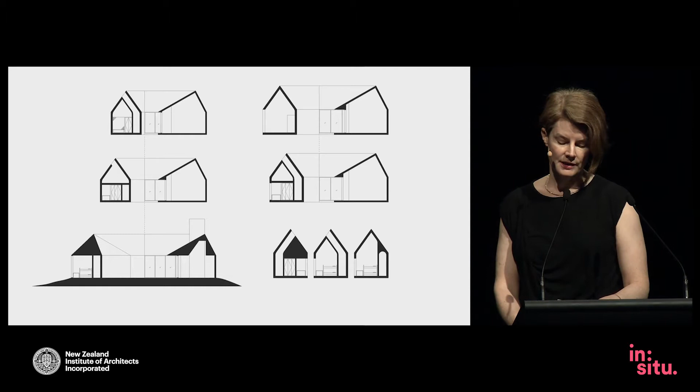At the beginning of each project, we establish a methodology of working by defining the rules that we are going to challenge as we work through the development of spaces and how they relate to their context and materiality. By establishing these methodologies, we're declaring that the critical aspect of architecture and discourse is significant, and the client understands that we will be bringing this criticality to the project.

Often in our practice, it is a set of limits that starts to define the establishing methodology of the work. So it's not about what you can do, but what you can't do.

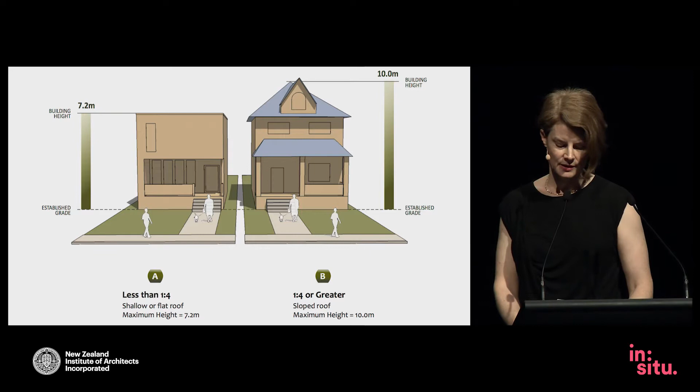A number of years back, the City of Toronto limited the heights of flat-roofed buildings, so we developed a project with a pitch that had these carved light wells subtracted from it. We parametrically associated the geometry of the cone with the various construction systems that we figured would be most buildable, looking at dimensional lumber in particular, and using the digital model to ensure that we had control over the lengths of the members, structural capacity, and things like that.

Limits can range in scale from broad regulations like zoning and building codes to the minutiae of the size of dimensional building products. For example, the number and thickness of laminations in a piece of airplane plywood.

Sometimes the limits are more esoteric, like the learning curve involved in folding new technologies into your practice, either on the design or the fabrication side of the equation.

I bridged the digital gap while in school, so I was trained by hand, but have developed strong digital skills so that I'm never far from the means of production. Everyone in our office kind of shares this bridge between hand and digital programming and things like that.

So this is where I'm from. I was raised in Chicago, and 20 years ago moved to Toronto when Shane got his teaching position at the University of Toronto. The city of Toronto is the fourth most populous city in North America and the largest in the Great Lakes region.

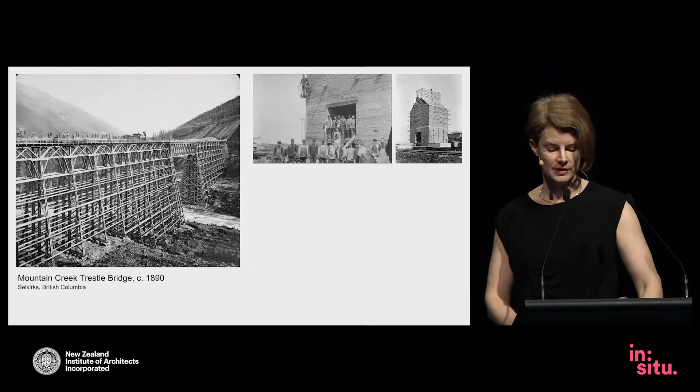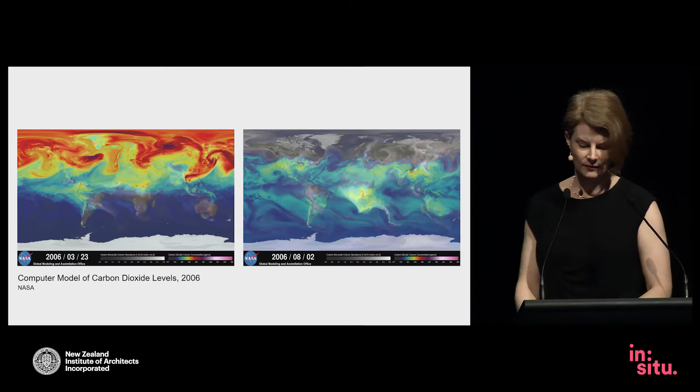In contemporary building, new growth timber is the only major building material that grows naturally and is renewable. It is sustainable, acts as a carbon sink, and has a low energy of production. Where steel and concrete were the focus of 20th century development in the building industry, we believe that technologically advanced wood products will drive the next wave of innovation. Canadian architecture should be at the forefront of this work.

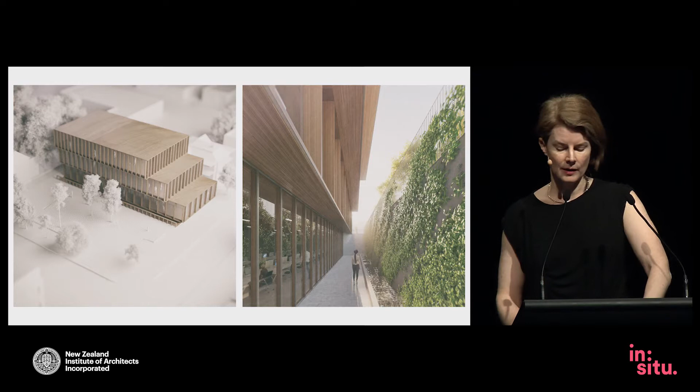This is a 3-story spec office building of mass timber construction that's currently working its way through the site plan approval process in Toronto, and we're really hoping that it comes out the other end intact and that we can actually achieve the building in timber as it's been designed.

Our proposal for the Canadian Prix de Rome, a traveling fellowship we won a few years back, was to research emerging wood technologies and to study the use of digitally fabricated construction, which we had been looking at on the scale of furniture and millwork for years.

After we finished our research trip, we mounted an exhibition called Living Wood. The work in the exhibition explores wood's material history with a digital exploration of the effect of mass movement in the landscape on the growth and form of trees.

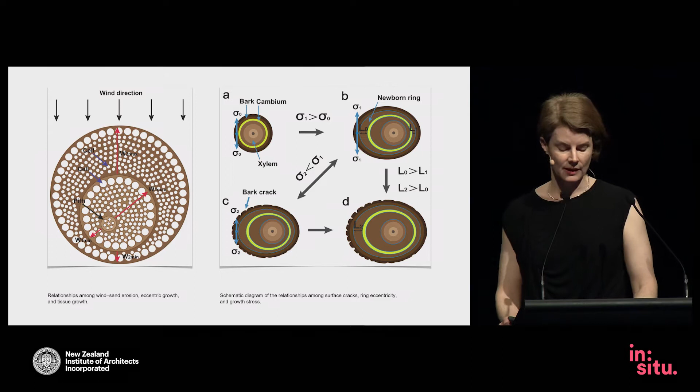Mass movements can also be caused by other forces like wind or a particularly heavy snow, which is the current hypothesis behind the crooked forest in Poland.

Tracings is a 200 square foot grid made up of 288 individual squares of Ontario white maple. Each piece was CNC milled to a depth that registers the angle of a curved surface projected onto its face and the depth. From a distance, one reads the undulating plane registered on the wood surface, and up close, the subtle differences between the pieces become apparent.

This urban forest is primarily designated as parkland, largely undeveloped and fiercely protected by local conservation authorities. Buildable lots that back up onto the ravines are prized, and the most valuable land in the city, in a city already known for really high land values and real estate prices.

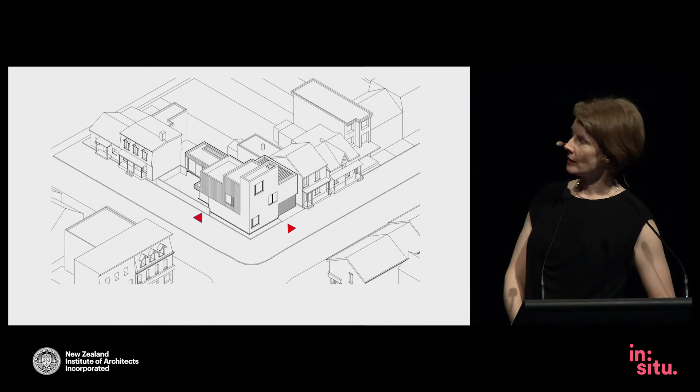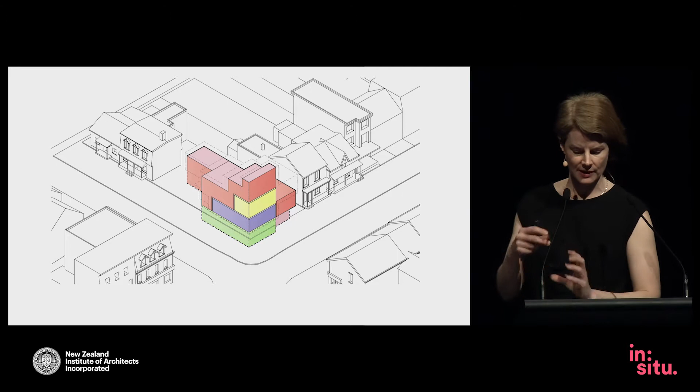There are 2 entrances, one on each side: on the left for the family and the right for the rental units. The entrance on the right corresponds with the green and blue massing shown here, which is a 2-story, 3-bedroom apartment that can be split by floor to allow for 2 separate rental units. Or for aging parents, the ground floor unit in blue can be combined with the single-family home shown in red—like a little puzzle of units stacked together. The yellow unit is the bed sitting room, originally developed for the grandparents and the family.

Each unit has a private green space associated with it. Increasing density on the site while at the same time increasing the amount of occupiable green space was a critical development in the project. The extended family shares the courtyard in the back, where the cooking and living spaces are, and each family member has their own private and protected terrace. The massing on the right, with the green space behind it, is over the garage, and there's a wall in front of it, but it's open to the sky.

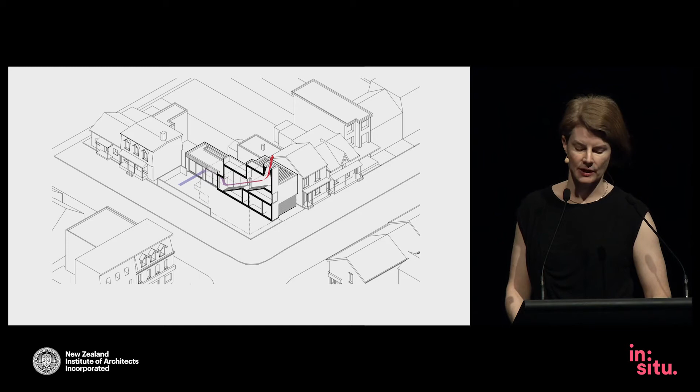We say the house acts as a blowfish—it's bigger than it seems because we captured exterior space with the front facade to increase the presence on the street. That green space was designated for the grandparents because they had really specific ideas about exposure and did not want their open space on the ground floor. The single-family home that climbs over the stacked units is connected by a straight-run stair with a skylight at the top, allowing for ventilation through the house.

While not explicitly a performative house from a measured sustainability point of view, there were a number of strategies we employed to tread lightly relative to resource and energy. The brick facade was made up of leftover bricks—we called all the brickyards in the city and asked for the remainders, the piles left over from bigger jobs that don't get used and would have otherwise gone to landfill sites. That's where we got all the brick for the project, and to unify them afterwards, we painted them white.

You'll also notice we have really small glazing units. In this project we have an 18% open envelope, meaning there's more wall available for increased insulation. There's a massive ice storm problem in Toronto, so we really need to keep all the heat into the houses—sometimes small windows is a good thing. The high-efficiency heating and air conditioning systems were broken down by unit, so you could turn them up and down depending on who is there and using them.

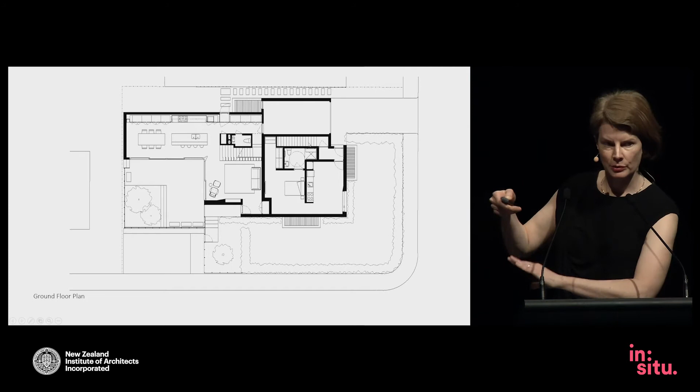I'll quickly just show the plan, this one critical piece. The family area is on the left here. This is the handicapped accessible rental unit with the door here, and a second door to the basement there, so you can split those 2 units. But the critical piece is actually this closet right there.

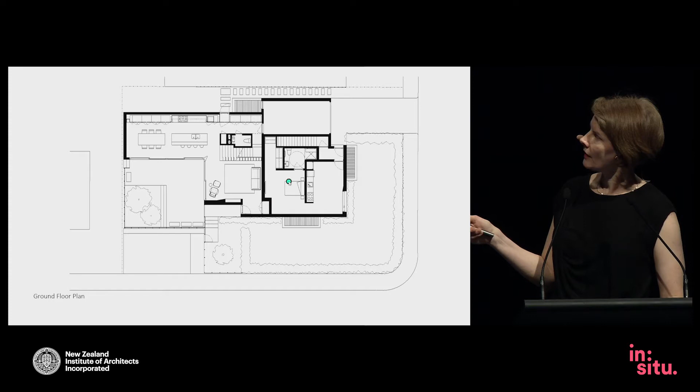Until the parents need the unit, that's a closet. As soon as mom and dad can't walk up and down stairs anymore and need to move here, which is fully accessible, this wall goes away, the closet goes away, and the accessible unit is connected to the main living, dining, kitchen, family spaces of the house. That was really the critical piece that made the family comfortable with the flexibility.

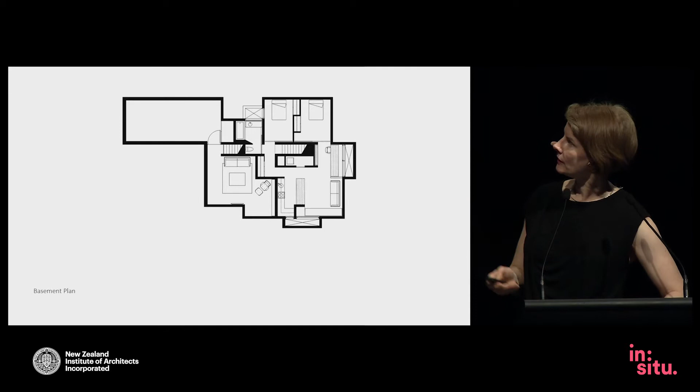Basement plan, just showing the rental unit on the right. And the family spaces on the ground floor are centered around this little courtyard where the house can open onto this private and protected terrace. We positioned sliding doors so that we could open up that corner to blend the spaces through the outside space.

Then this bookshelf stairs, the one custom piece we had, it was a relatively low budget project. Otherwise, we used all out-of-the-box systems like IKEA systems for kitchen and cabinetry. So it was actually a very economical project for the family.

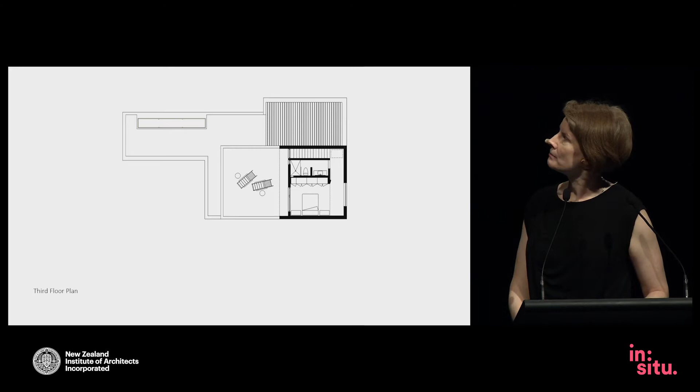When we started working with the family, there was an imperative to create ways that the family could move around the house privately. So there were these little secret stairs and passages that would cut between spaces so that everyone could come and go discreetly.

I think this really came from Shazan and Ryan feeling like they had to protect their privacy and maintain a life that was separate from their parents' life, because they didn't want to feel like they were back in high school living with mom and dad. As we worked through the design process, all of this really fell away, and instead we created spaces that were all shared.

This is also when Mr. Chu claimed the best room in the house for himself. As we were framing, he saw that the master suite on the third floor had this really big, high, north-facing window, so it was quite private, with tons of light. The south had a huge deck with southern light coming in, nice and warm. He thought this was just the space for him.

So he and his wife actually moved into the master bedroom, and Shazan and Ryan are kind of down below a little bit. But everyone's happy, which is important.

As part of the exercise of this project, we developed what we call a visual pro forma, explaining and showing how the total project cost could be amortized over multiple generations. To live multi-generationally strongly suggests a buy-in to forecast the cost and commensurate usage of the home intergenerationally.

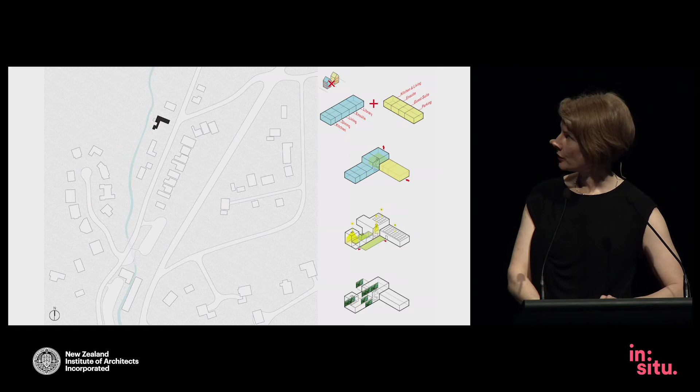The house was conceived as 2 distinct residences. On the left in the diagram there's library, kitchen, living, dining, and ensuite, and on the right, kitchen, living, dining, ensuite, extra rooms, and the garage. They sit perpendicular to each other, creating a little landscape forecourt in the front, and they stack in the corner. The parent suite occupies the ground floor, and you can see that the ground floor is on the left and the second floor is on the right.

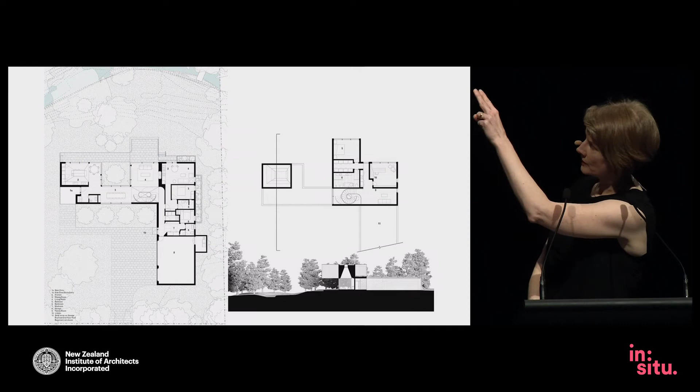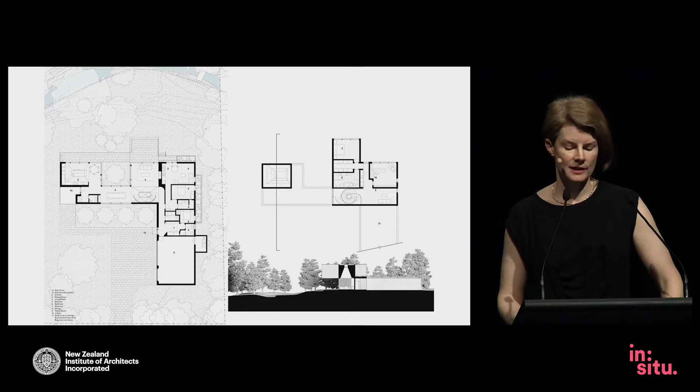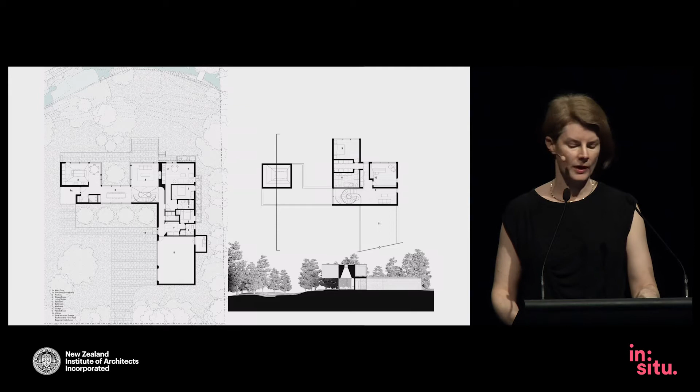In the parent suite's there's a big bar that starts at the view and works back to the garage. The suite is laid out as a single floor accessible apartment with added features to accommodate the specific challenges facing the aging parents. Among them, well-located drains and a master power switch to help mitigate issues that have come with memory loss - sinks left running, ovens left on, and things like that. A second bedroom is adjacent to that suite, but separate, for a live-in relative or a nurse.

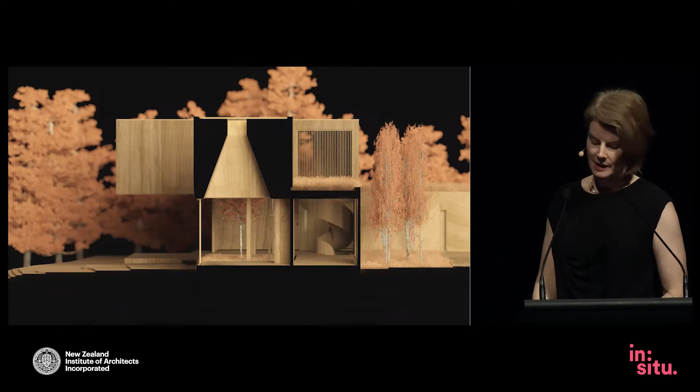Running parallel to the creek is the main residence. The kitchen on the right anchors the south end of the house. Set in a double height volume, the 20-foot tall pyramidal ceiling creates an expansive space that opens up onto the creek, the courtyard, and above to the sky.

The dining room occupies a glazed link, as shown here in the model, between the landscape that flows up from the creek through the courtyard and to the front of the house. Early in the design process, the clients told us that they never used their current dining room except on holidays, and the space was essentially wasted.

So we developed this idea of making the dining room more like a passageway, so they would always pass through it - it wouldn't go unused - and they would move between the kitchen and the living room through the space. Now, given the light and the views, they actually use the space every day, which is something they never expected and really enjoy, which is a really nice outcome for us that we're pretty pleased with.

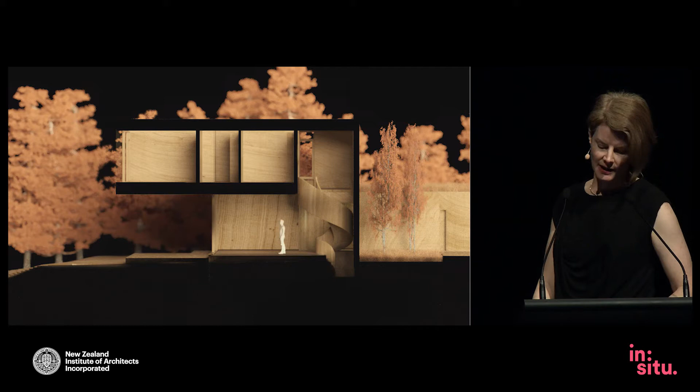The grand gesture of a wood-clad spiral staircase connects the living room to the second floor master suite, creating a unique moment in the otherwise orthogonal room and celebrating the connection between the floors. The curvature rises and opens at the same time and becomes the ceiling of the hallway down to the left, which leads to the parents' apartment.

The stair is structured with sheets of laminated plywood. The white oak railings become really thin, like 2 inches or less, curved structural elements that bridge between the floors. The complexity of the system is seen in the connections between the layers, with two sides tied together by the treads, effectively creating the tight inner spiral as a post. The way it connects to the adjacent wall created an opportunity to express this material weaving that happens in this area.

The small second floor above acts as a private suite. There's a lounge with a concealed bar that extends from this large landing. There's a library space, and a light-filled cantilevered bedroom reaches out to the best views of the creek.

Sustainability was a really important part of the design process for this project, so material durability and longevity were really important. The ground floor of the house on the back is glass, but on the front it's clad in locally quarried Algonquin limestone, which meanders around the perimeter of the house.

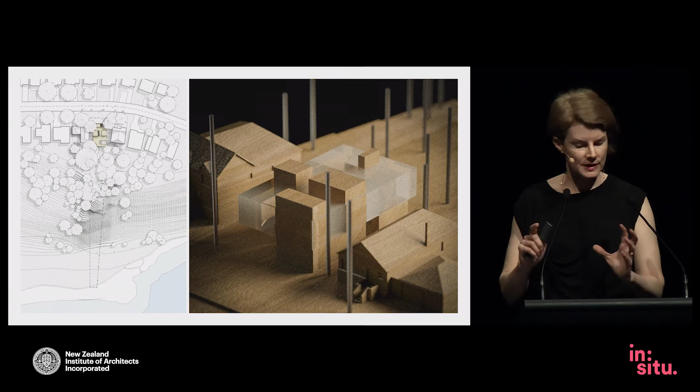There are the shoring walls that rise above grade and become a series of light receptors, each figured to the program that they'll be housing. They're topped with operable windows, so we can get some breezes up and through the house, with shading on the south side to modulate the light.

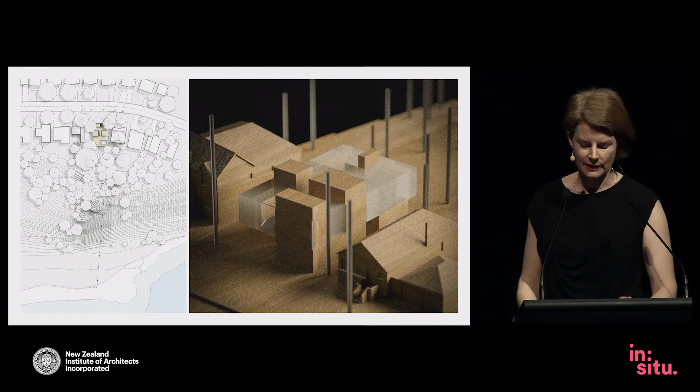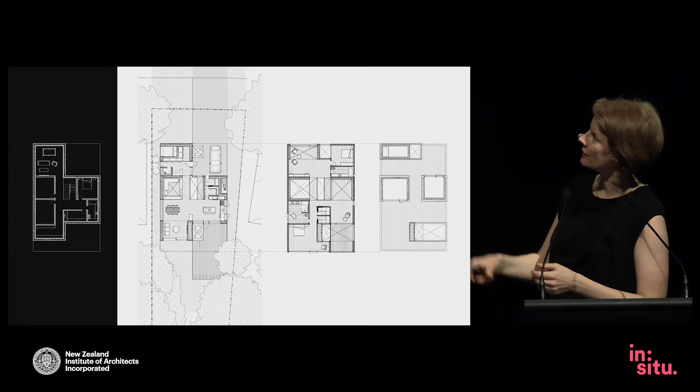And then you combine that with the defined negative spaces, the green spaces, you kind of get the big picture of the house. It's a series of plans that I won't really walk through, but showing that foundation on the left, and then the first floor plan in the white area, you can kind of see how the boxes, the concrete boxes, are filled with program, and as they come up, they get the X's, which means they're just kind of rising up empty and end up into the skylights on the third floor.

So the north side of the house, this one volume marks the entry threshold, and inside it holds the support program, and then there's an office space with light coming in on top. In the middle, a pair of concrete volumes anchor the center of the home, double height at the dining room, capturing southern light through a clerestory and creating shadow play on the walls.

On the east side, the other volume opens up onto the second level for the painting studio, which was required to have even north light to work and elevation above the tree line so Kelly could have a view of Lake Ontario. So here's Kelly on the left.

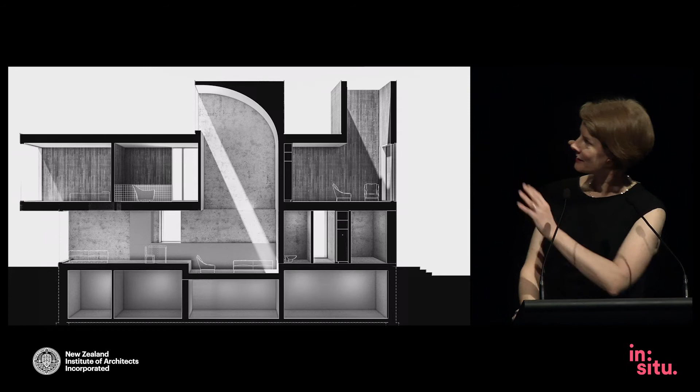The volume—this is just a potential section, we haven't quite decided on what that's going to be. The 4th volume, on the left there, is at the rear of the house. It anchors the living dining space with a master above.

It defines an exterior courtyard inside the space of the house that creates a pocket of green and provides privacy between the bedroom and the 2nd floor living room with a deck. By breaking down the intersection of the concrete volumes and the 2nd floor spaces, cross views emerge with connections to the ground floor and the sky above.

Light fills the house and will make the concrete read both planar and volumetric at times, catching the movement of the sun throughout the day. So catching, reflecting, diffusing light is one of the things we're really looking into on this project. We've just finished schematic design and are moving into DD, and this will be under construction next year.